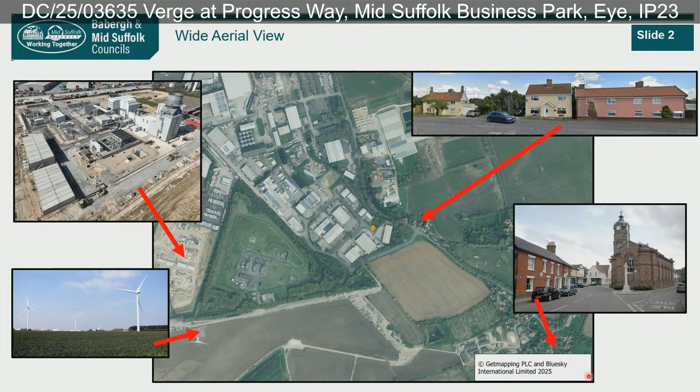Looking in a bit closer, we've got the site there, so that's the grass verge. We've got some offices, including a charity and a funeral directors. We've got a food supplies company warehouse, and a pallet storage warehouse to the southeast.

This is a map of constraints. The only one on there is a grade 2 listed building within a wider agricultural farm, so it's not really within the setting of the application site.

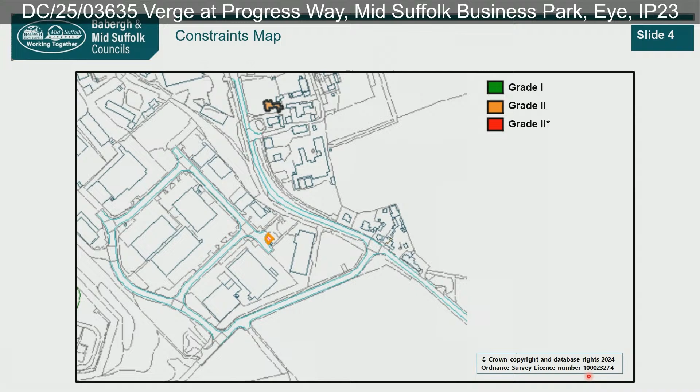Here is a close-up view, so we can see the existing hedgerows along the northeast and southeast sides and the proposed area of the battery storage unit. So you can see the 4 units, and then to the north of that is the grid interface cabinet.

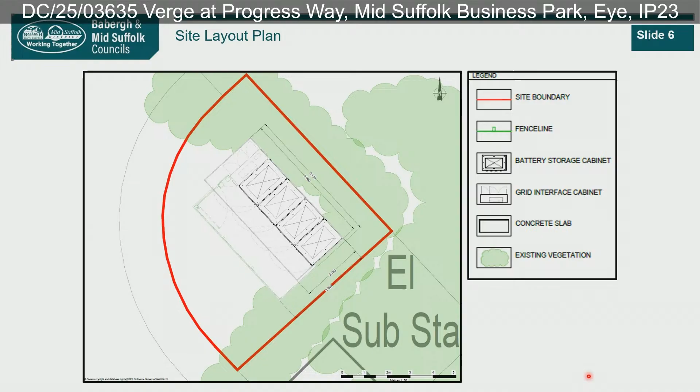It's quite translucent on this plan here, but you can also see the outline of where the fencing will go. Here are some elevations of the timber fence that will surround the battery unit.

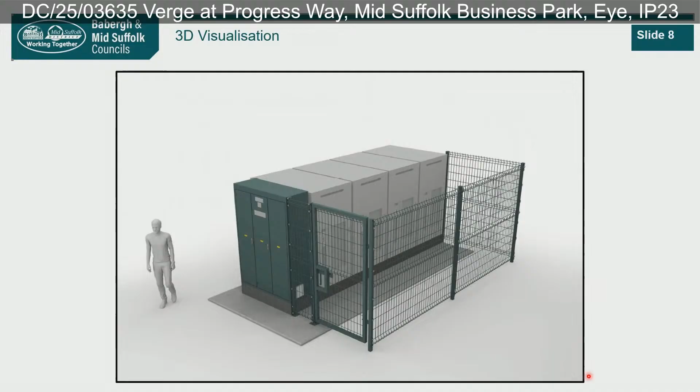And this is a 3D visualization, but excluding the proposed timber fencing. And here is another plan, again just showing that same 3D visualization, but in 2D, so that's the green mesh fencing and the 4 battery units.

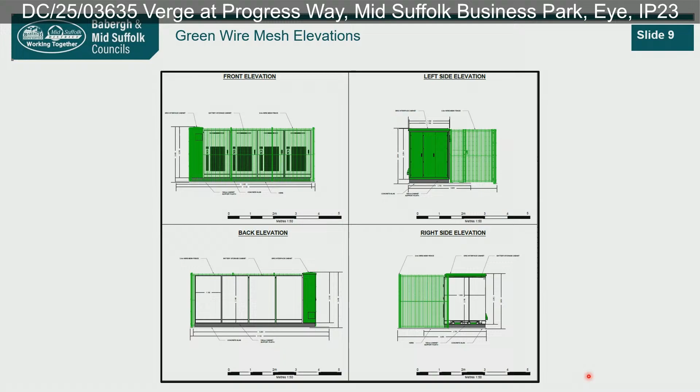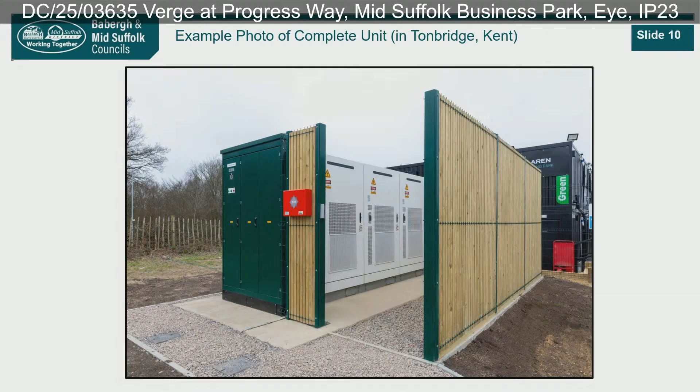Consultee comments: the Town Council in Eye have objected. They raise concerns over other battery storage system applications in the area, such as the Fieldview Yaxley one, which is to the southwest of the site, a couple of hundred metres away. No other consultee objected, so we didn't have any objection from anyone.

Environmental Health did request some conditions within their comment. These are the list of recommended conditions that were set out in the report: standard time limit, approved plans, and construction hours.

Environmental Health requested a post-installation noise report due to concerns with the neighbours approximately 100 metres to the east, and biodiversity enhancement measures, including the retention of the existing hedges where possible.

Decommissioning and site restoration: after the 30-year lifespan of these boxes, if they're no longer used, the site should be decommissioned and returned to how it currently is. A connection agreement, so that we know the battery box is connected to the grid.

Fire safety management plan, so that would outline what happens if there is an issue with the boxes, if they do catch fire. Neighbours, including businesses and residents, would be notified and know what to do in case of a fire. And emergency access and water supply, which ties in with that condition above, for what to do with the water or whatever is used to extinguish the fire if one does occur.

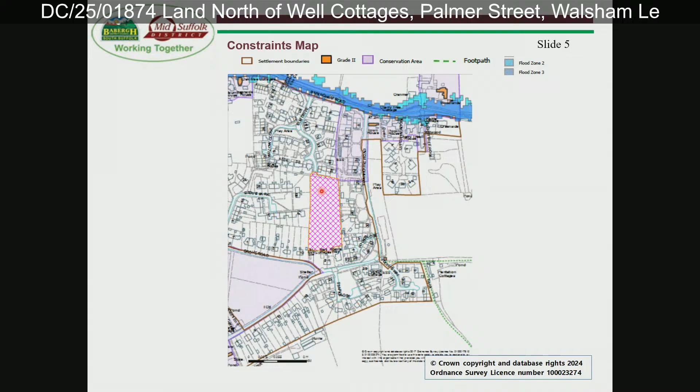It's not showing up on the map for some reason, but we do have a few patches of surface water, areas at risk of surface water to the northern boundary, and a few others to this boundary as well. But for the majority, these are just to the edges of the site, not within it.

we can comfortably fit 15 dwellings on the site with sufficient distance to the existing dwellings on either boundary. In terms of the access point, as we noted, that is to the north, adjoining to some of the comments refer to as the Elmside Estate. I've referred to it as the Elm Road Estate in my report, but we're discussing the same estate there.

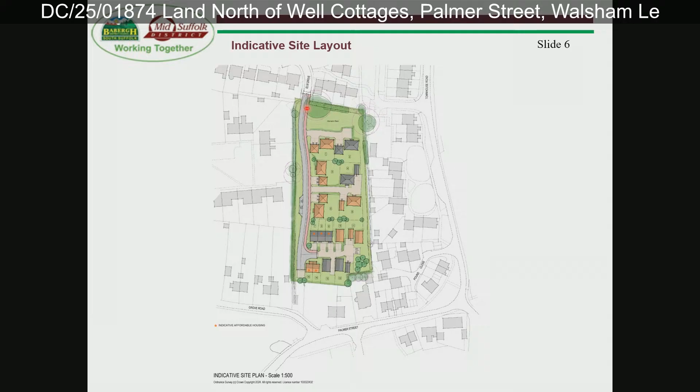Again, just giving another indicative layout plan and showing how the access road could look as it curves along the edge of the site.

There we go, sorry, I'm doing it on the wrong one. We can just have a little look at the plan as well. There we go, so hopefully you see that obviously that then joins up with the road right at the top of the screen onto that existing, and I think you can just see the footways on the existing. I have to admit my eyesight's not quite good enough to see it on that one. But Alex, maybe you can help us out with what's their footway wise.

So yeah, so we've got the two footways on the existing road. We don't get two footways on the proposed road, but the slight, hopefully members can see it, I am struggling. There is a pinky orange line on the right hand side of the grey roadway. Thanks, Alex, that's really helpful. That is the footpath as proposed. So hopefully that clarifies, but happy if there's any more questions.

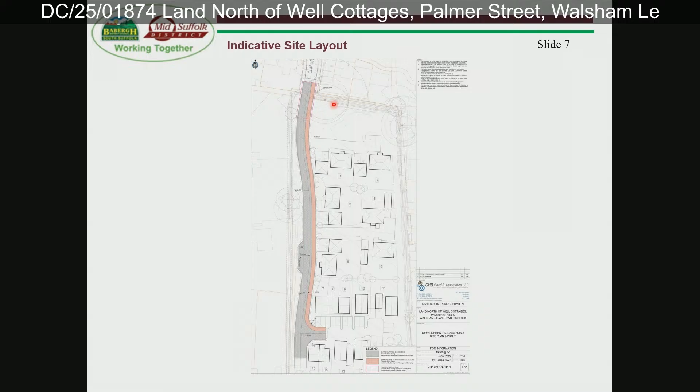Yes, I'm just struggling. So it's got the width there, but from the pictures provided, it looks like the access to the gate has hedging up close to it. Is that width given? Are they going to remove the hedging and the trees to one side? How is that width going to be provided for the road? Because it appears that the road measured is wider than the gap shown in the pictures. So how are they going to get that width, because it's not currently there. None of it is clear because what's shown there doesn't match up with the pictures of the entranceway.

Sorry, we're scrolling again through the pictures. We'll come back.

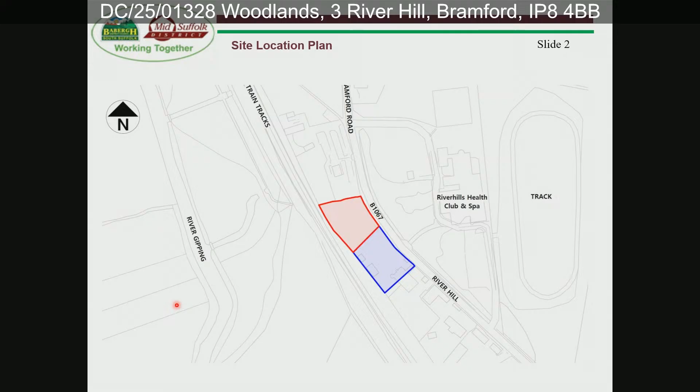This is the constraints map, showing that there are no heritage assets nearby and the site is not within the flood zones. It also shows that the site is outside of the settlement boundary, but borders the district boundary between Mid-Suffolk and Ipswich. As the site is outside the settlement boundary, the proposal is contrary to policy SP03 of the Joint Local Plan. The proposal also does not meet the requirements of any of the exemptions, including policy LP01, the windfall infill policy.

However, there is currently a lack of self-build land supply, and therefore the local plan cannot be considered up to date in this case. Given the shortfall of the land supply, significant weight should be given in support of the development, and paragraph 11 of the NPPF should be applied.

Under this paragraph, the default position is to approve the application unless protected areas or assets give a strong reason to refuse, or if negative impacts clearly outweigh the benefits when considering the NPPF as a whole. In this case, it relates specifically to establishing whether the site can be considered a sustainable location. This is discussed further within sections 3 and 4 of the officer report.

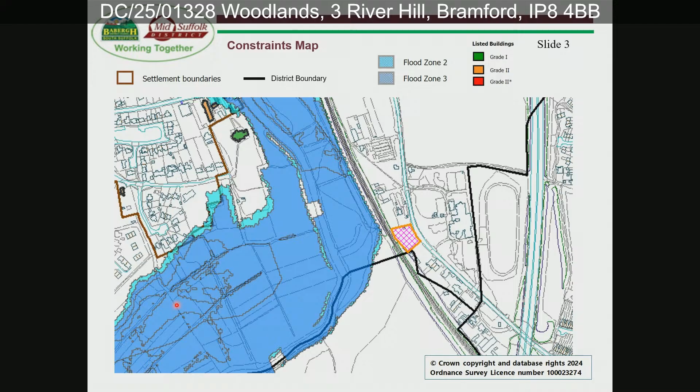This is therefore why officers consider that the site is in a sustainable location. This is the site layout showing the dwelling positioned centrally on the site. The plan on the right-hand side shows there is approximately a 54-metre distance between the closest neighbouring dwelling, which is to the south of the proposed dwelling.

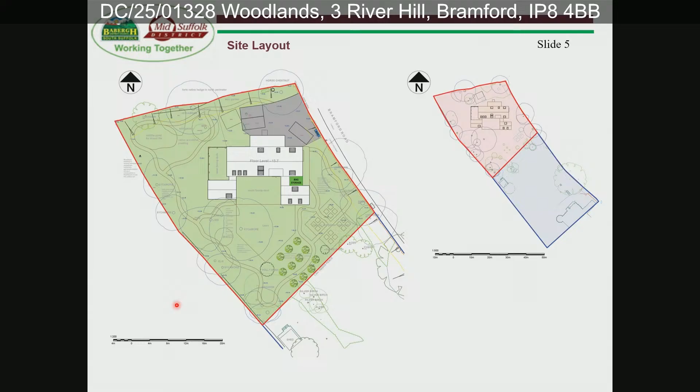These are the CGI plans of the dwelling. It is designed in this way to enhance its viability as an eco-dwelling and is designed to meet the applicant's needs. Our housing SPD requires applications to demonstrate that they meet the definition of self-build, relating to the initial occupant having primary influence over the design of the property, and the property not being built to a specification offered by developers. The applicant has submitted a statement detailing their involvement in the design process, and the application documents set out that the new dwelling is for long-term occupation by the applicant.

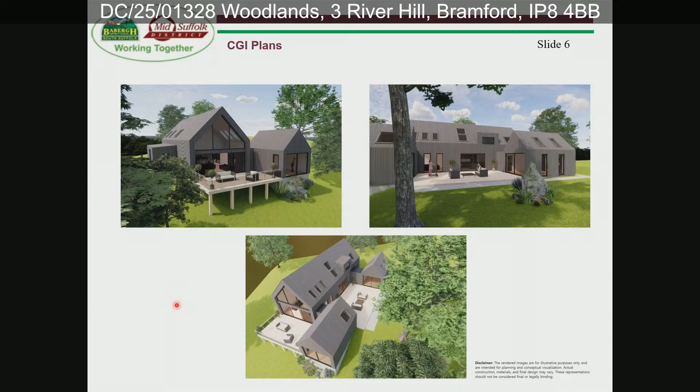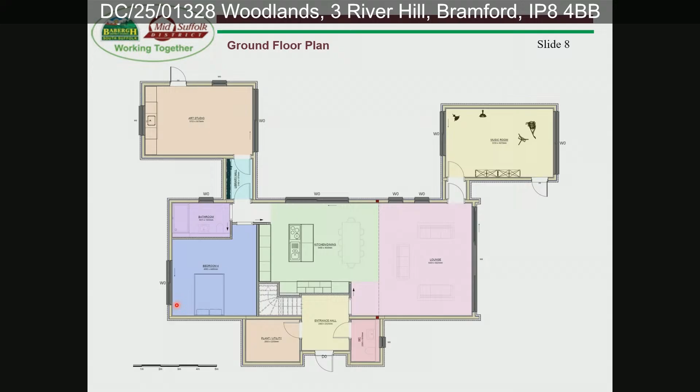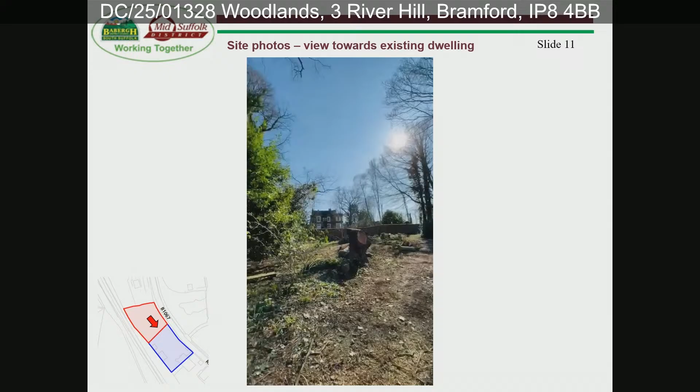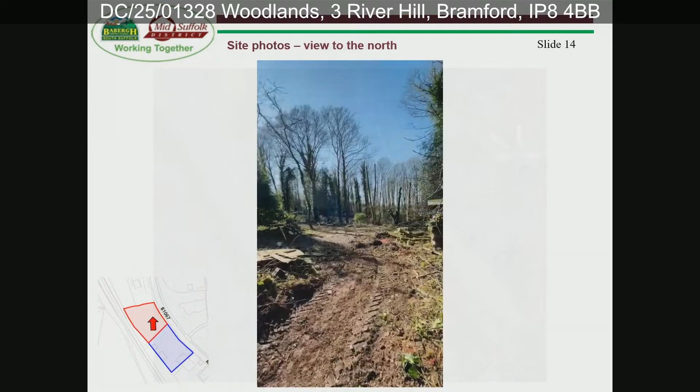In conclusion, officers consider the site to be in a sustainable location and would be a genuine self-build, secured by a legal agreement, which would contribute to our self-build land supply. There have also not been any objections received. Therefore, the recommendation is to delegate to the Chief Planning Officer to secure a unilateral undertaking, and only then to grant permission subject to conditions. Thank you.